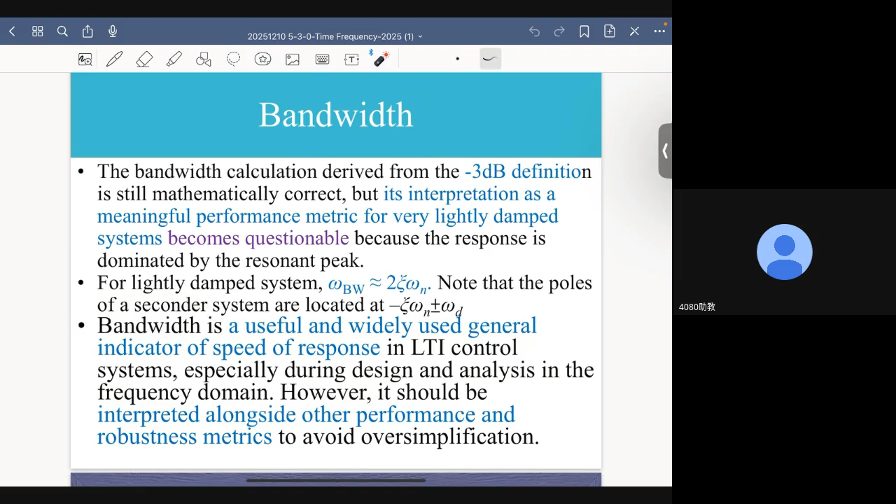Now, the next topic we want to talk about is the impact of an additional zero for underdamped second order systems. Up to now our focus, let me put it this way: we all know that in the s domain or in the frequency domain, transfer function can be represented like this, where P and Q are both polynomials of s or frequency. Now the roots of Q, which is the characteristic polynomial of the system, are called poles. And the roots of P are what we call zeros.

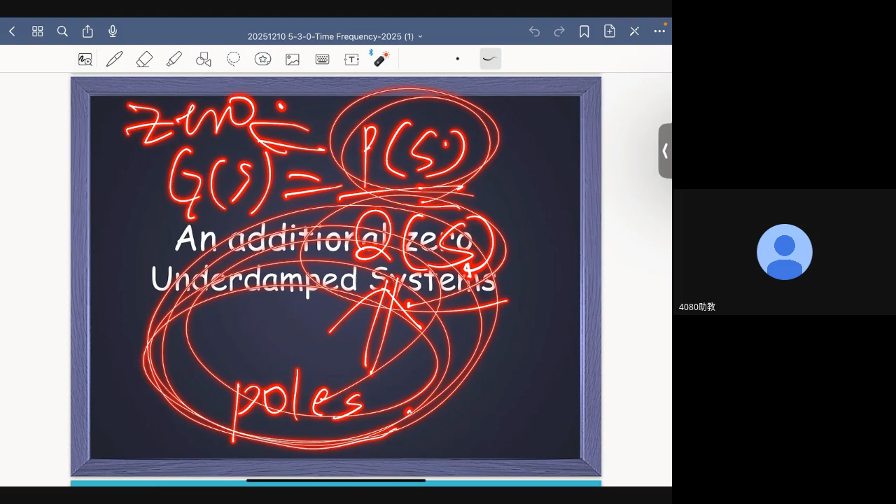Up to now our focus is on poles. It's not that we never talk about zeros, but we have not intensely discussed the impact of zeros. There is only one exception: that is the non-minimum phase system, okay? In that case we have unstable zeros. Now we want to specifically talk about an additional zero, stable or unstable, okay?

Now, for a second order system with an additional zero, its transfer function looks something like this. Originally, for a second order system without a zero, its transfer function looked like this. Okay, so now we have an additional zero, which is located at -a. So the numerator includes this factor, omega n squared divided by a, rather than just s plus a. Why do we want to do that?

Well, why do we want to have these additional terms? The reason is that we want to preserve the original system's DC gain, all right? Let me put it this way. Originally, this is what we have, right, for the standard second order system without zero.

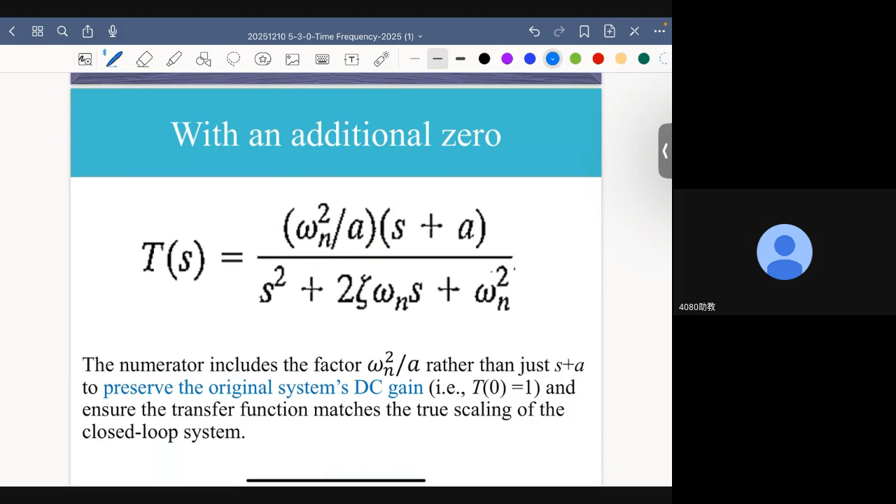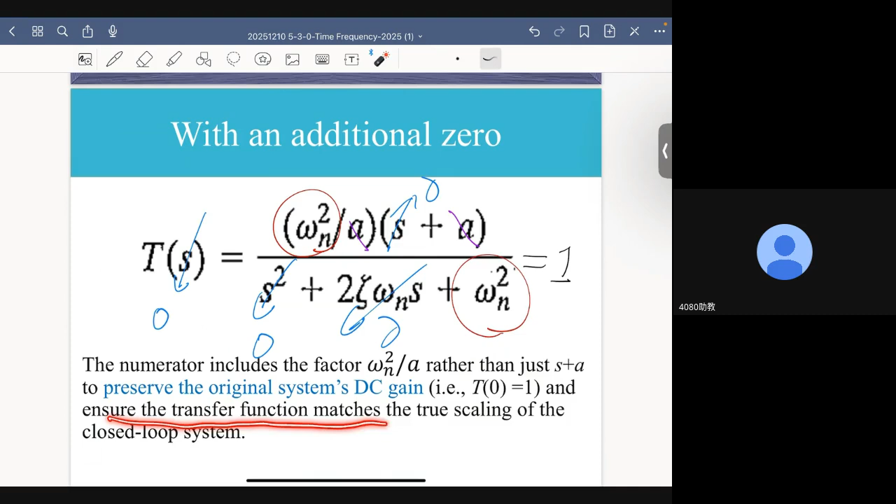Now the same thing happens here. If I have this term, then when s is equal to 0, this becomes 0, and this term becomes 0, and these two cancel out. Then what is left is this and this, okay? Apparently the final number is 1 when s equals 0. So this term is introduced to preserve the original system's DC gain, which is 1, and to ensure that the transfer function matches the true scaling of the closed-loop system, all right?

So where did this additional zero come from? Can I do without it? Probably not, okay? Because here we want to examine PI control for a first order system.

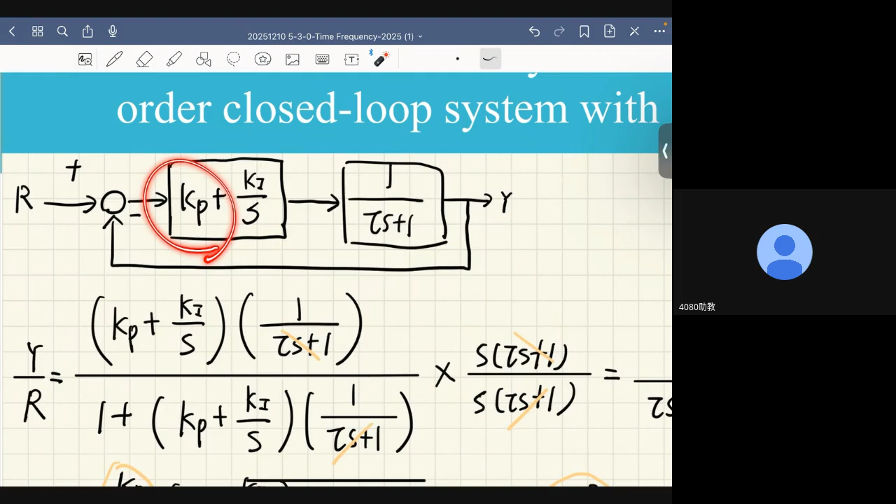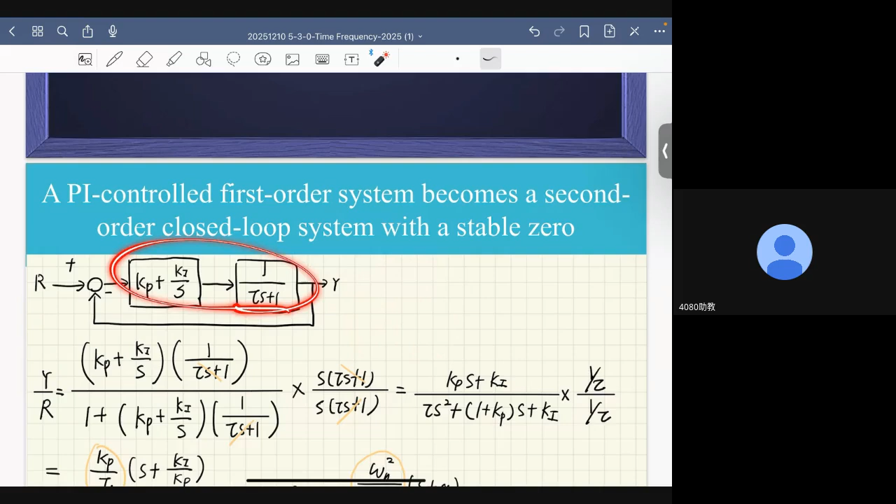Now, this is a first order system where tau is a constant. Let's set up a feedback control system. And this is our controller, which apparently is a PI controller, because this part represents the proportional control, and this part represents the integral control. We all know that for a negative feedback system like this, the transfer function is actually G over 1 plus G, where G in this case is the product of these two transfer functions, which appear here and also here, all right.

Now let me rearrange this representation. The first thing I do is multiply both the numerator and the denominator by s times tau s plus 1. And this cancels out, and these two cancel out with the other, all right.

And then s times this term, okay? So this cancels out, giving me Ki. And by multiplying s with Kp, it gives us Kp times s.

I can do the same thing to the denominator. When I multiply s with 1, it will give me s, which appears here, all right? And then multiplying with the remaining term will give us this result.

Now, let me multiply everything by 1 over tau, and this is what I get. Why do I want to do that? Because I want to convert the leading coefficient of the denominator of this transfer function to 1, okay? So this is exactly what I get.

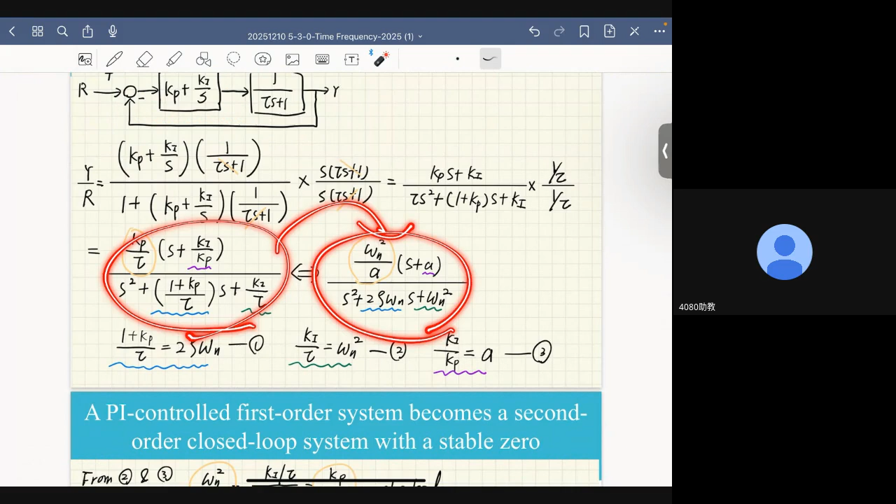Now, this is actually the transfer function of this feedback control system. Let me compare this with this, term by term. Remember, this is the transfer function that we just defined.

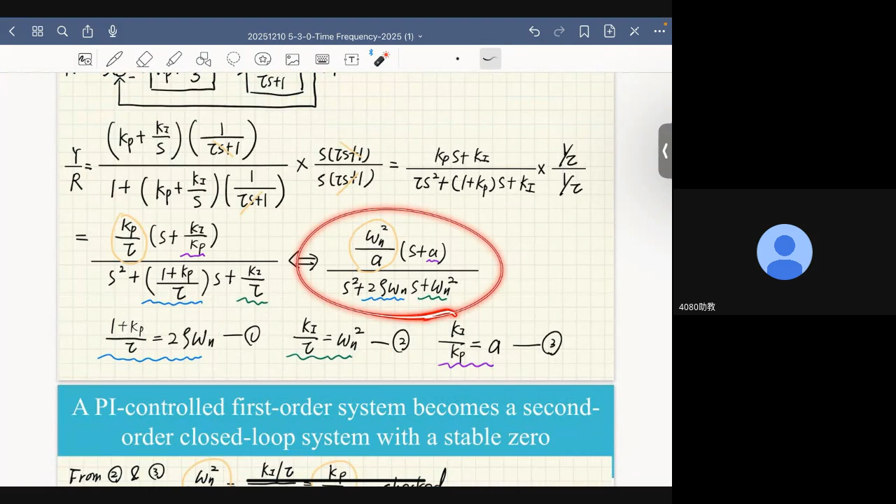A standard second order transfer function with an additional zero. So let's compare the transfer function of this feedback control system with the standard second order system's transfer function, plus an additional zero.

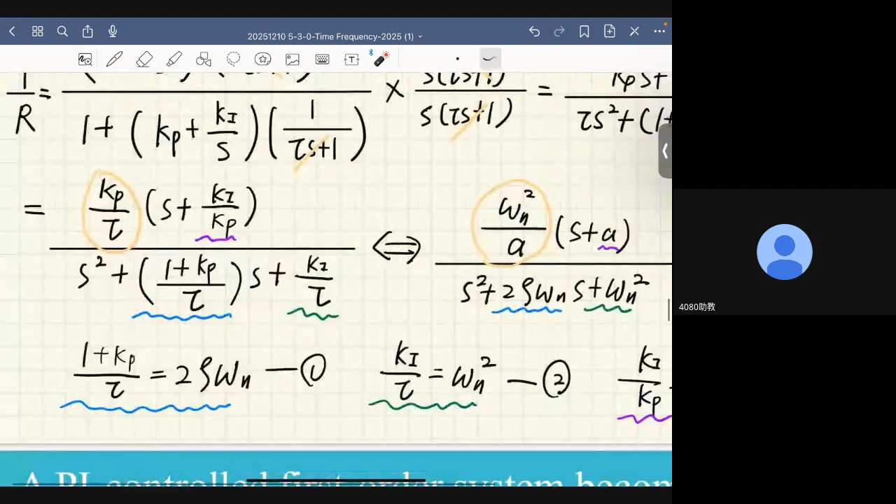Term by term, this is actually this. Similarly, this corresponds to this, and this corresponds to this. I hope it is easy for you to see, because for these term by term connections, I use colors to identify their relationship.

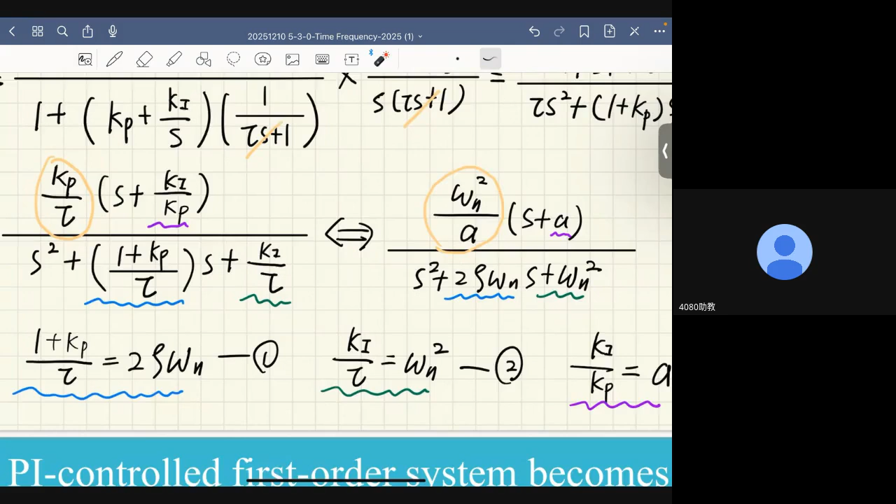So if this equals this, then 1 plus Kp divided by tau should be equal to 2 zeta omega n, where zeta is the damping ratio and omega n is the natural frequency. This gives me equation 1.

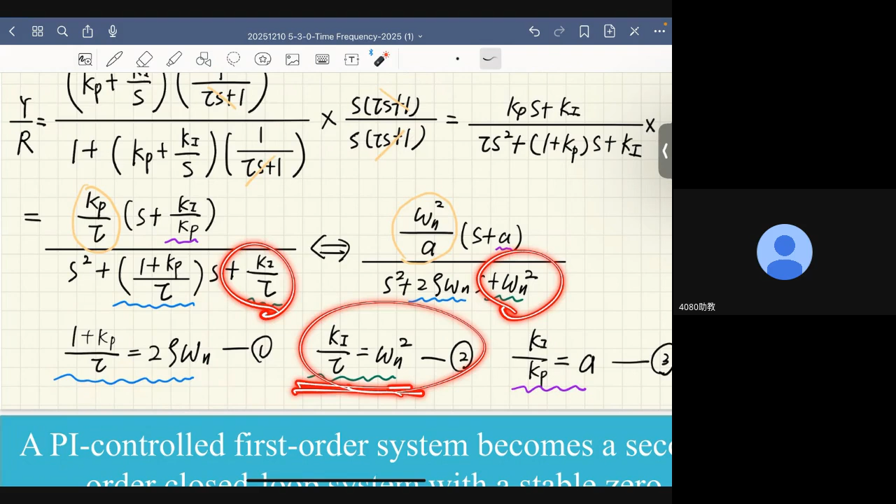If this is equal to this, then this gives us equation 2. Finally, if this is equal to this, then Ki over Kp is actually equal to A.

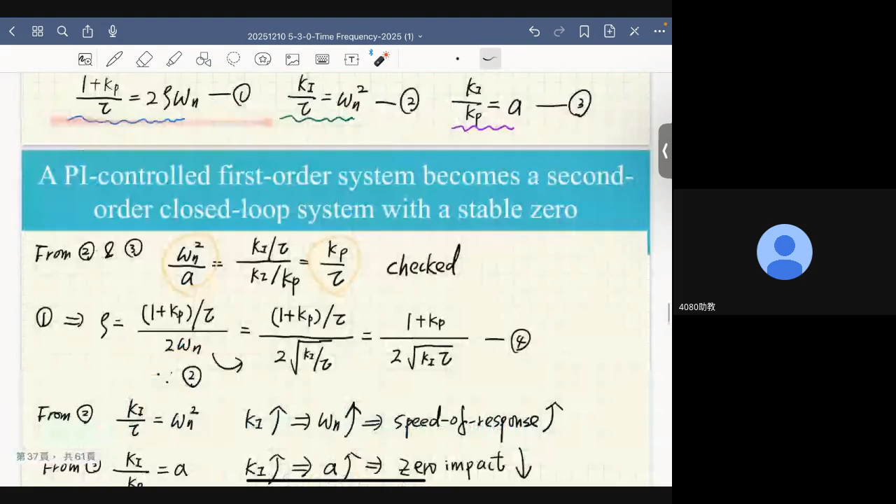Now, from equation 1, what do I get? If I rearrange equation 1, this is what I get. Now the same thing happens here. From equation 2, what do I see?

Equation 2 tells us that omega n squared is actually proportional to Ki. Why do I care about this equation? Because I'm designing this controller.

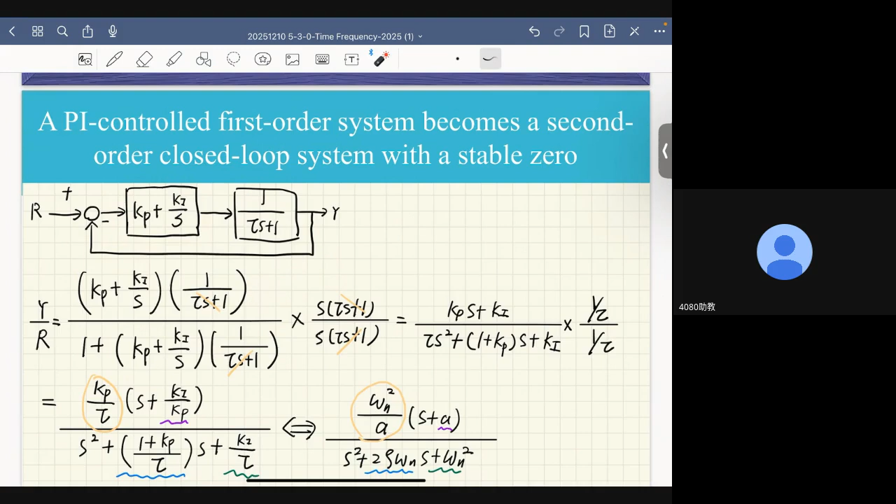The first thing I do is set up the feedback control configuration. The second thing I do is choose PI control. So after doing the first and second things, the third thing I need to do is determine the values of Ki and Kp. I need to determine the right values for my proportional control and integral control.

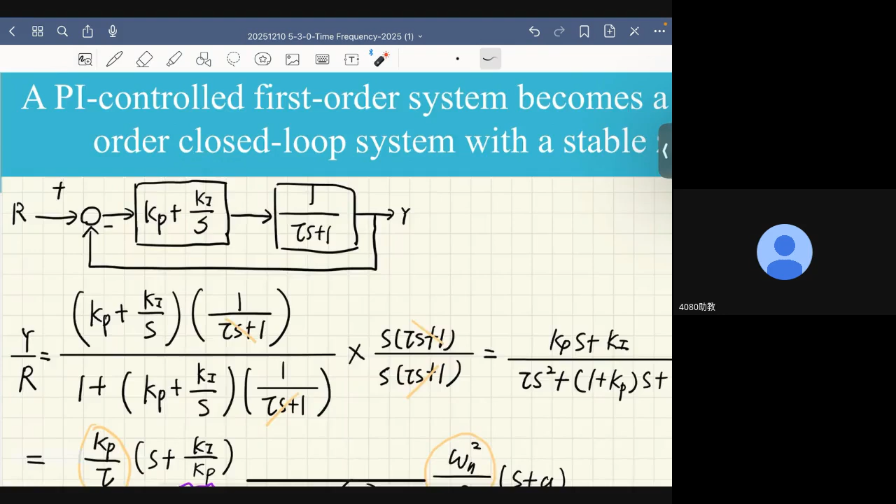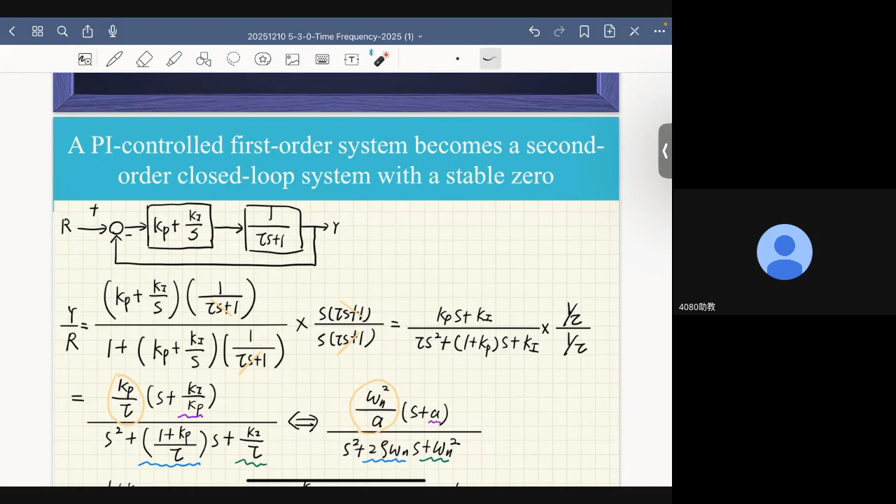Now, how do I determine Kp and Ki? Since I'm dealing with a second order system, and since I already know the impacts of damping ratio and natural frequency on the performance of a standard second order system, the next thing I want to do is identify how Kp and Ki impact natural frequency and damping ratio.

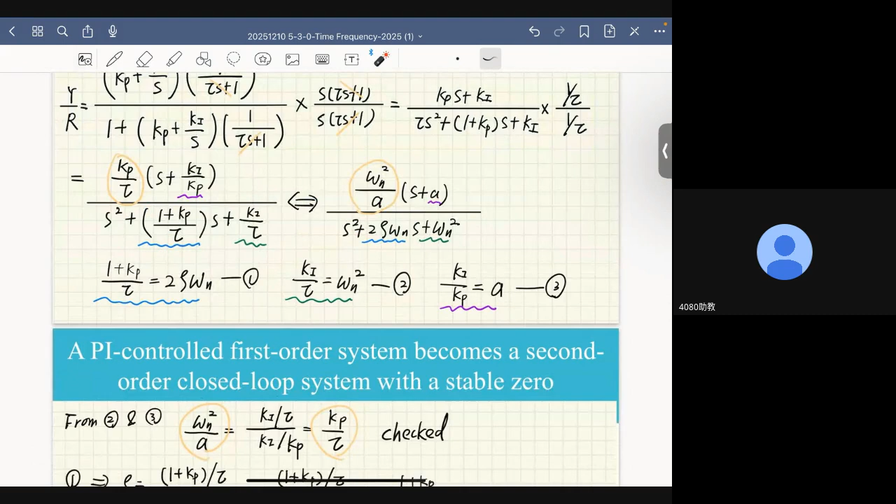For example, here it tells us if I increase the value of Ki, that is, increase the strength of the integral control, then the natural frequency will become larger. In this particular case, increasing integral control increases the speed of response of this feedback control system. So this equation tells me about the utility of the integral control.

Now, with this equation, I know that if Ki is fixed, given, then increasing Kp increases the damping ratio. So these results give me some clues on how to tune my integral and proportional controllers.

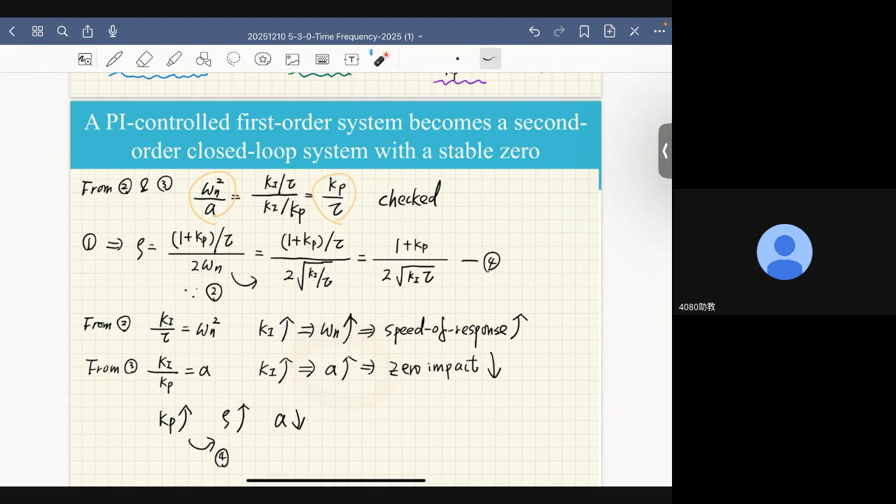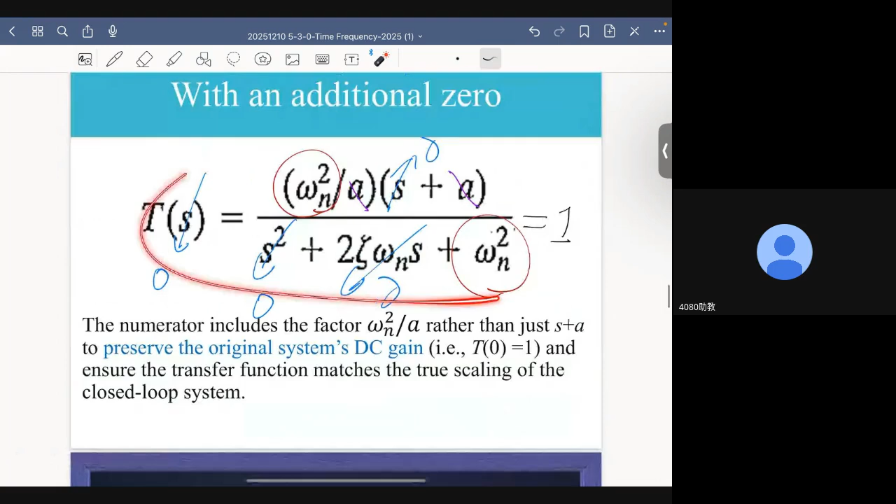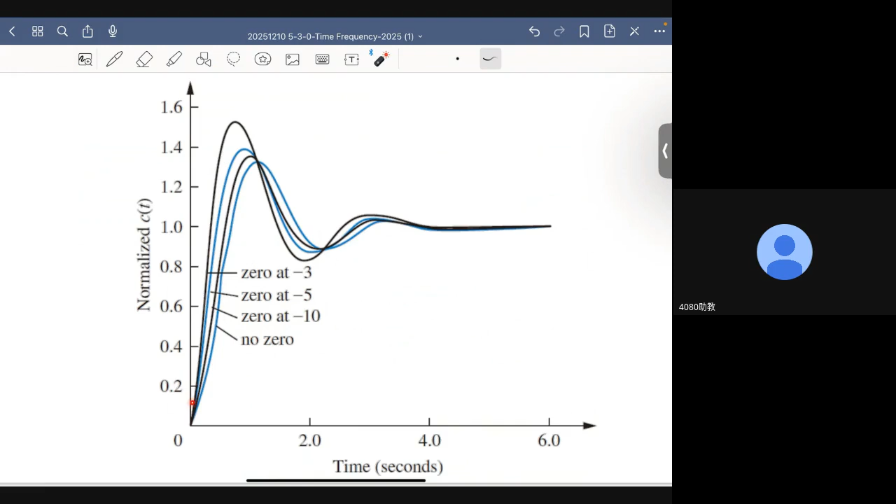Now let me introduce a zero. In the beginning, let's assume it is located relatively far away from the imaginary axis, at s equals minus 10. Then, compared to this blue curve, with this zero, the overshoot becomes slightly larger.

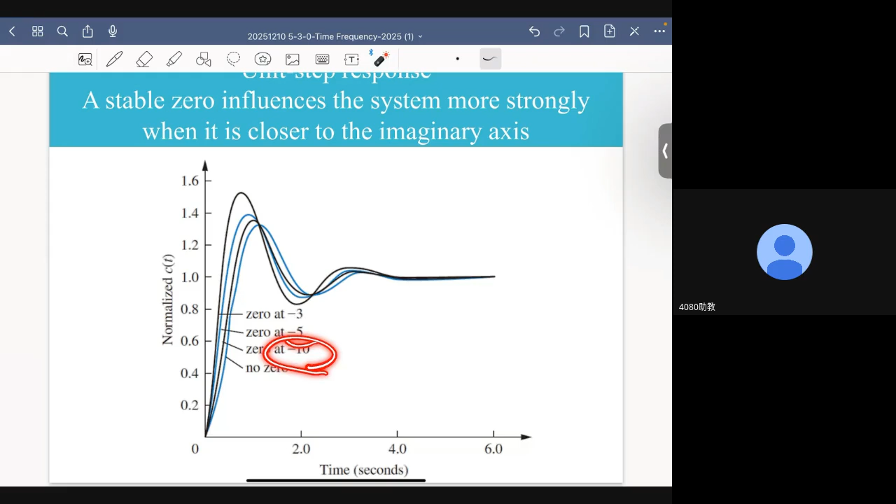But if I move the zero closer to the imaginary axis, let's say from minus 10 to minus 5, as you can see, the overshoot becomes even more, it becomes even larger.

Now let me do that again, even closer to the imaginary axis. Now I move the zero from minus 5 to minus 3.

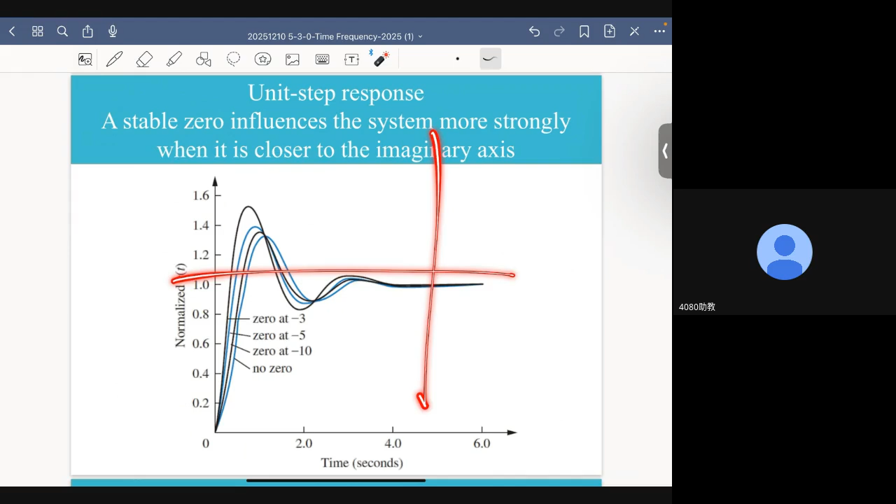Now the overshoot is even more pronounced. So why is that the case? Here, as we can see, a stable 0 - what do I mean stable 0? I mean the zero is on the left-hand side of the s-plane. Otherwise, if I have an unstable 0, whenever I have an unstable 0, what I have is a non-minimum phase system. Dealing with non-minimum phase systems is another story. Up to now, people still don't know how to deal with non-minimum phase systems effectively.

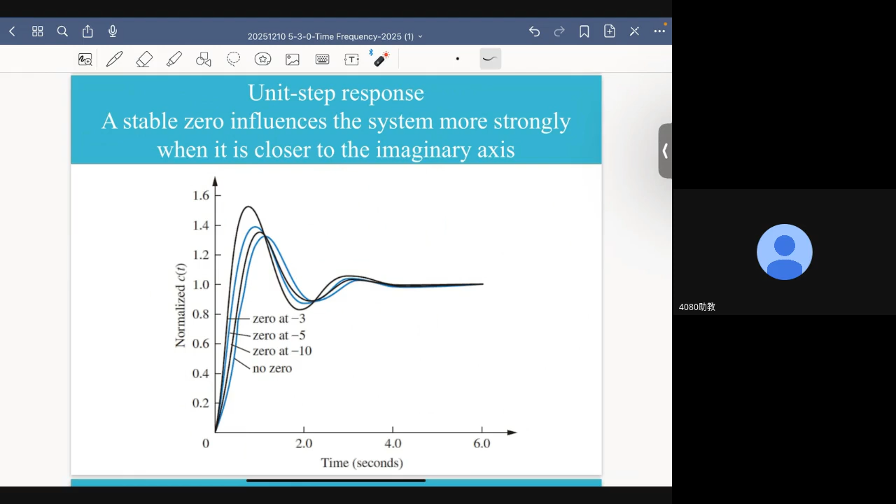Now a stable 0 influences the system more strongly when it is closer to the imaginary axis. This is what we can tell from the results of these curves. Now, one important thing is why this is happening, why this statement is true. What's the reason behind it?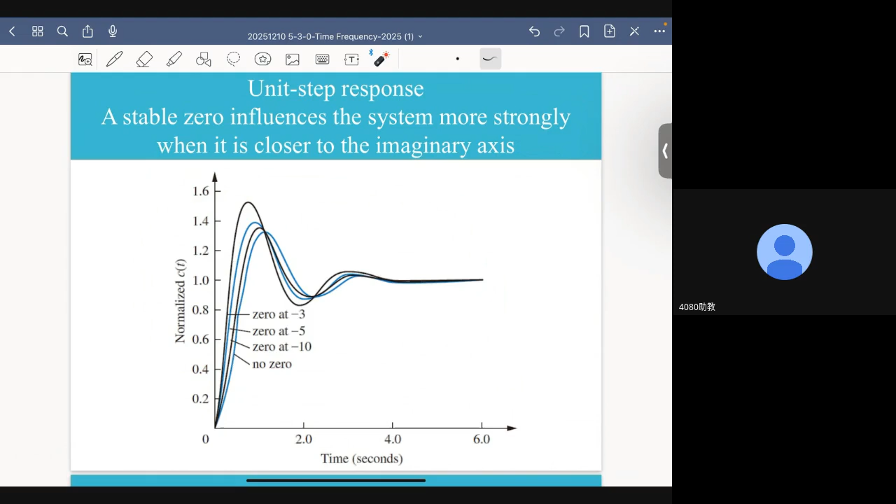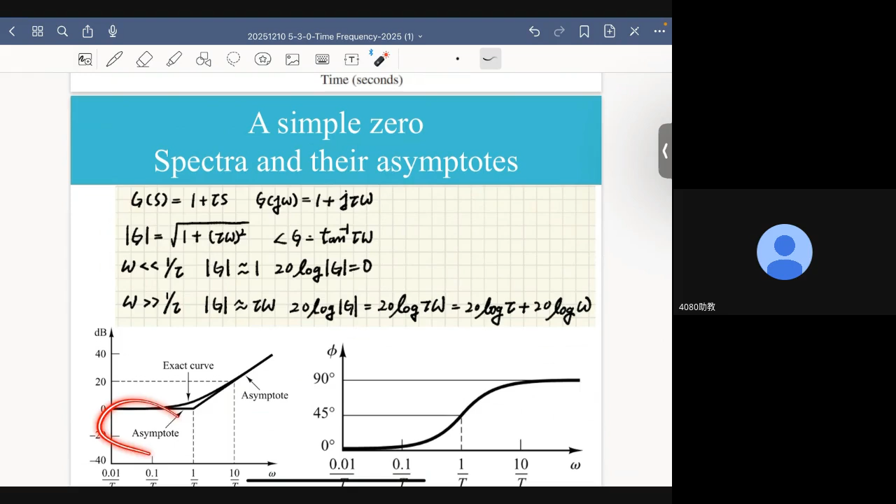These are the results given in the time domain, but the real reason is hidden in the frequency domain. We saw this slide before. Here, what we have is the spectrums for a simple zero. These are the mathematical derivations for setting up the asymptotic statics for a simple zero, similar to a simple pole.

Here, we identify the corner frequency. But here, T is not time constant - time constant comes from the characteristic equation, from the denominator of the transfer function. This T is related to the numerator of the transfer function, so this is not a corner frequency, but you can still think of it as a break frequency. After all, it breaks the amplitude response of the simple zero into two regions.

Now, for a simple pole, the magnitude plot looks something like this - it goes in this direction, that is, the slope here is minus 20 dB per decade. But for a zero, its impact is exactly the opposite. Instead of decaying at a rate of 20 dB per decade, it actually increases with frequency at a rate of positive 20 dB per decade.

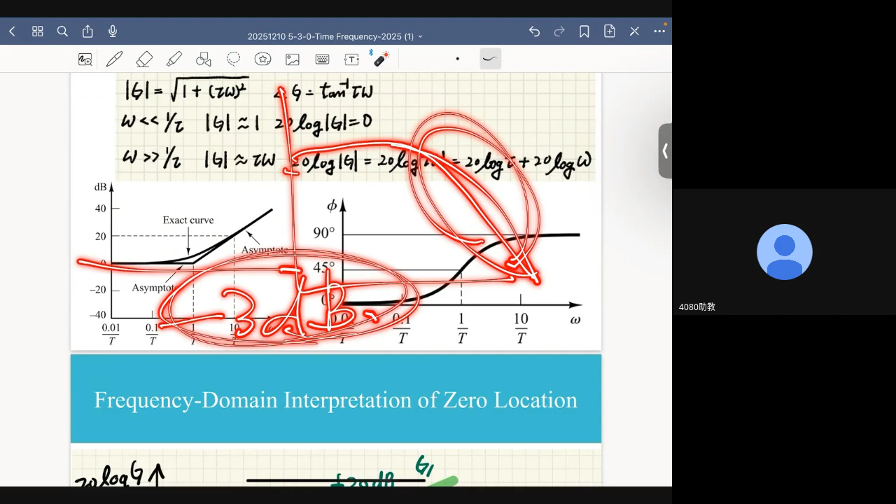So what happens is this tends to increase the bandwidth of the system, because by definition bandwidth is where your frequency response drops minus 3 dB. If I introduce a zero, it will reverse this decaying trend, so I will probably reach the minus 3 dB level at a much higher frequency.

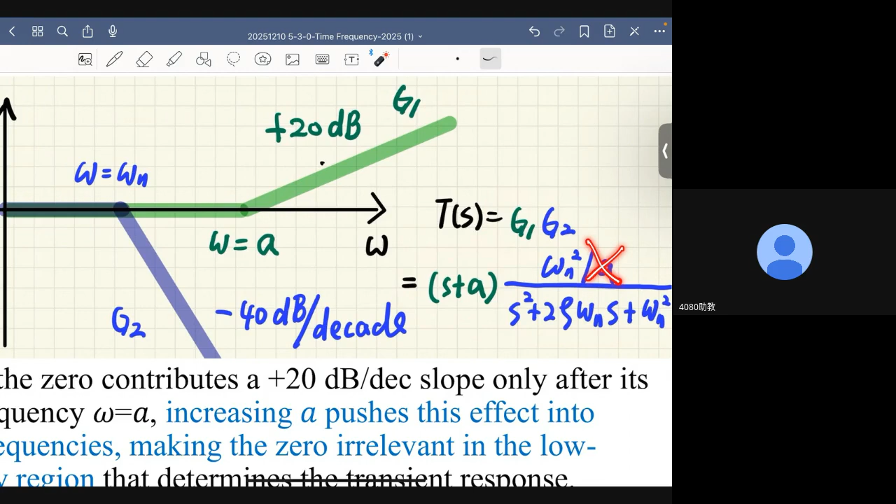So remember what we have is this system. Let me break it into two parts: the green part represents the zero, and the blue part represents the standard second order system. Let's just ignore A for the time being.

Now remember the reason why we want the Bode diagram - we want to use the magnitude plot of the Bode diagram in the first place because when it comes to the amplitude spectrums, we can add their frequency response curves together. Here we have multiplication, but when I take log, this multiplication converts to addition. Remember that. Now for the zero's amplitude, there are two ways these two parts can be put together.

It all depends on which subsystem starts breaking away earlier - which subsystem starts its so-called breakaway action first. Now for this case, because the zero contributes a positive 20 dB per decade slope only after its break frequency of omega a, the break frequency for the zero is here.

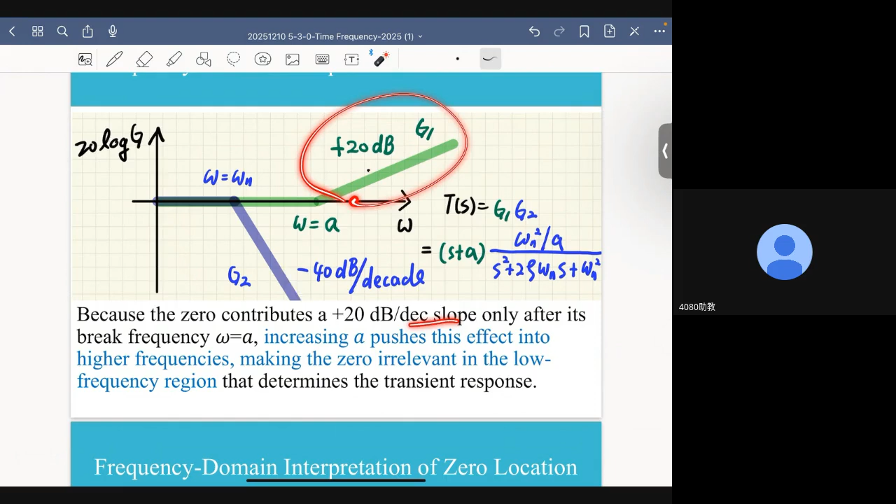Because if the natural frequency of this second order system, which is approximately the break frequency of the second order system, is located here, then this minus 40 dB per decade impact appears earlier than the zero's impact. Since the slope of this curve is minus 40 dB per decade, in comparison this positive 20 dB per decade increase becomes relatively insignificant - it will be almost cancelled out by this factor. But it can be the other way around.

Decreasing A shifts the effect into lower frequency. As a result, Z significantly amplifies the resonance and produces overshoot, because it appears earlier in the frequency domain. Therefore, it will most likely increase the bandwidth, and the system will move faster. But the cost, the price we need to pay, is that resonance can be amplified and we might have larger overshoot.

So what we are seeing here is that the relative location of the pole and zero really matters. This is an ideal case. By contrast, this is a non-ideal situation.

Now let's look at the impact of the relative location of Z and the damping ratio. Here, what I have is the magnitude plots of a standard second order system, which turns on when the frequency increases to the natural frequency of the second order system.

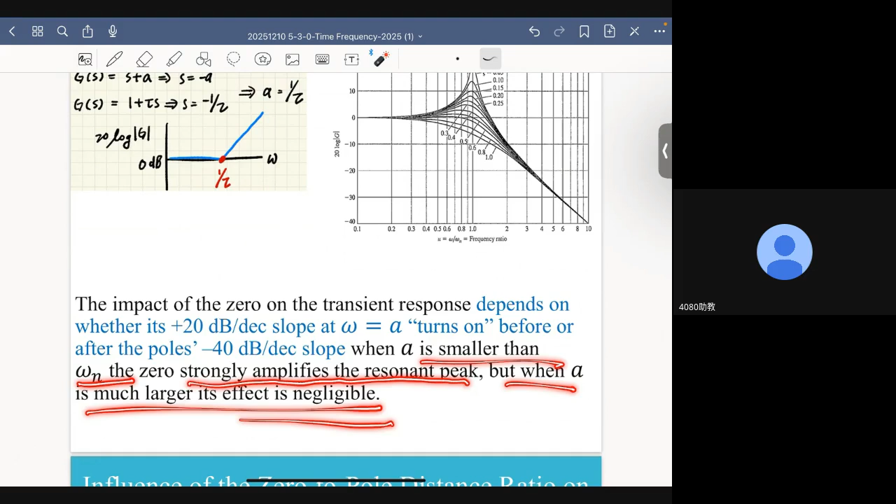The impact of the zero on the transient response depends on whether its 20 dB slope at omega A turns on before or after the pole's minus 40 dB per decade slope action. When A is smaller than omega n, the zero strongly amplifies the resonant peaks. But when A is much larger, its effect becomes negligible.

Now let's demonstrate that by showing the unit step responses with different zero to pole distance ratios. A is the distance between the zero and the imaginary axis. Remember, the root of the characteristic equation is minus zeta omega n plus j omega d, where omega d is the damped natural frequency, which equals omega n times the square root of 1 minus zeta squared, when zeta is smaller than 1.

So here we are talking about an underdamped system. The parameter is the ratio between the distance of the zero to the imaginary axis and the distance of the pole to the imaginary axis. This ratio determines which frequency will appear earlier in the frequency domain.

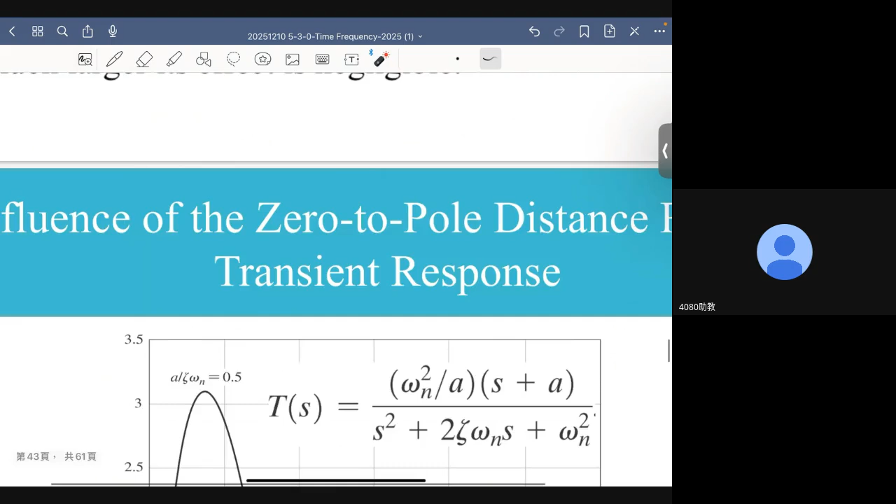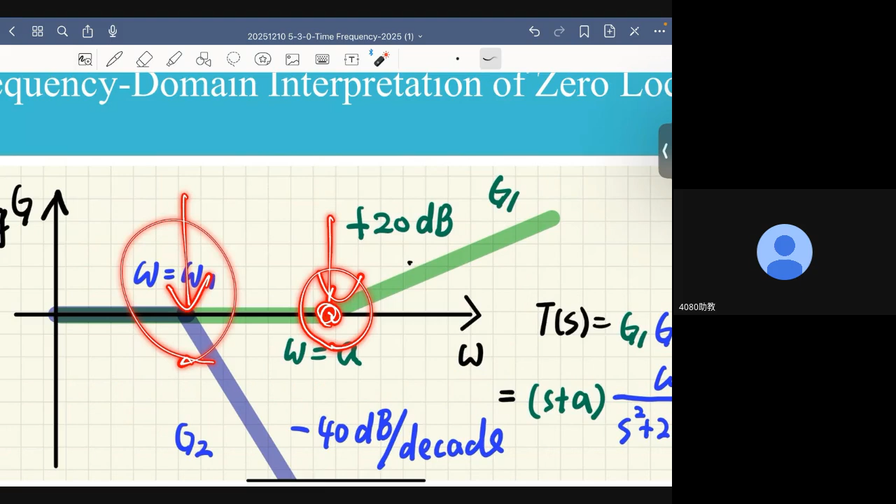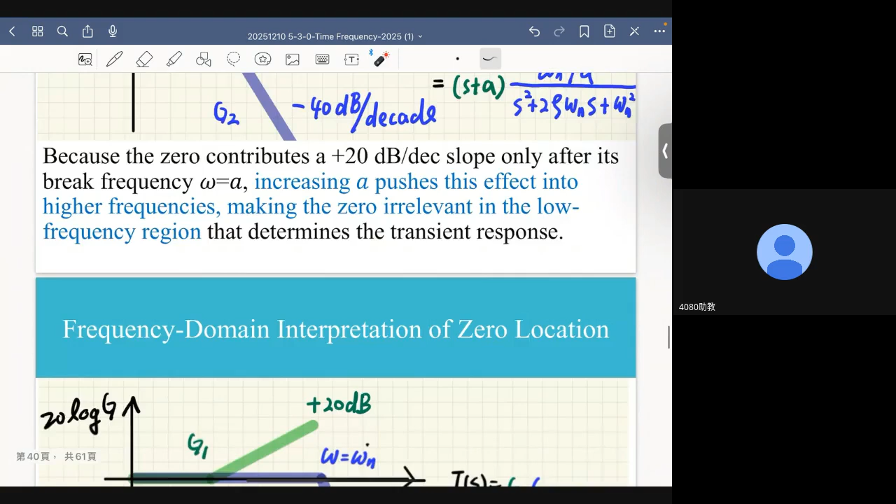Now, when this ratio is very, very large, meaning A is much larger than zeta omega n, this frequency is about 10 times higher than that frequency. So the high frequency component enhancement impact caused by the zero becomes negligible in this case, and therefore its unit step response is very similar to that of a standard second order system.

However, if I move the zero closer to the imaginary axis, the ratio drops from 10 to 2, and as you can see, the overshoot increases dramatically. If I go one step further, so that the pole and zero have the same distance to the imaginary axis, the overshoot becomes even larger. And it becomes very large when this ratio reaches 0.5.

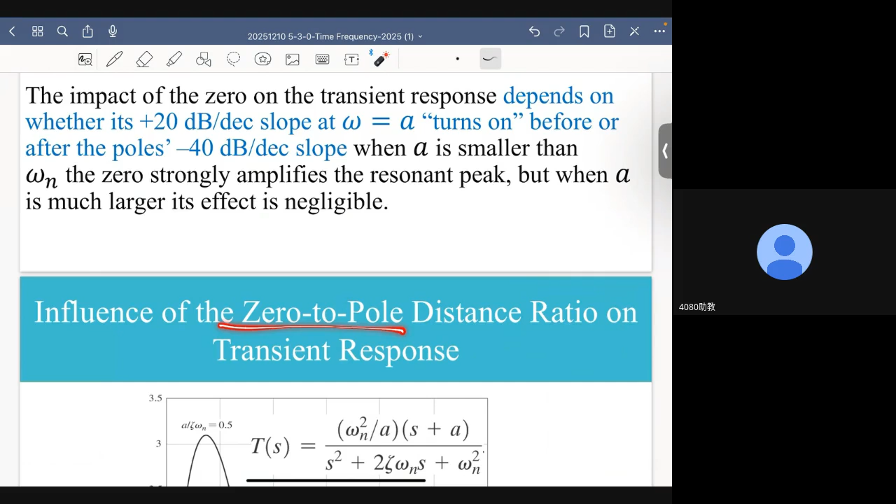So that is why the zero matters, and how much impact a zero has really depends on this ratio, the zero to pole distance ratio, meaning distance to the imaginary axis.

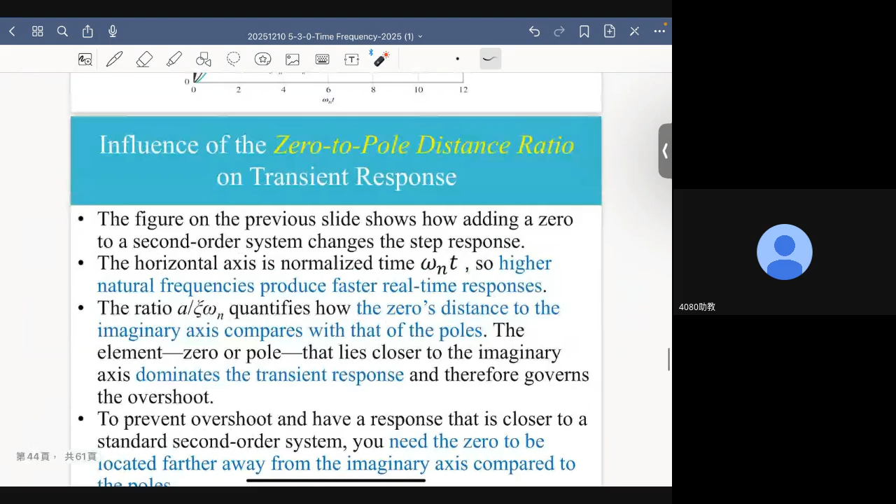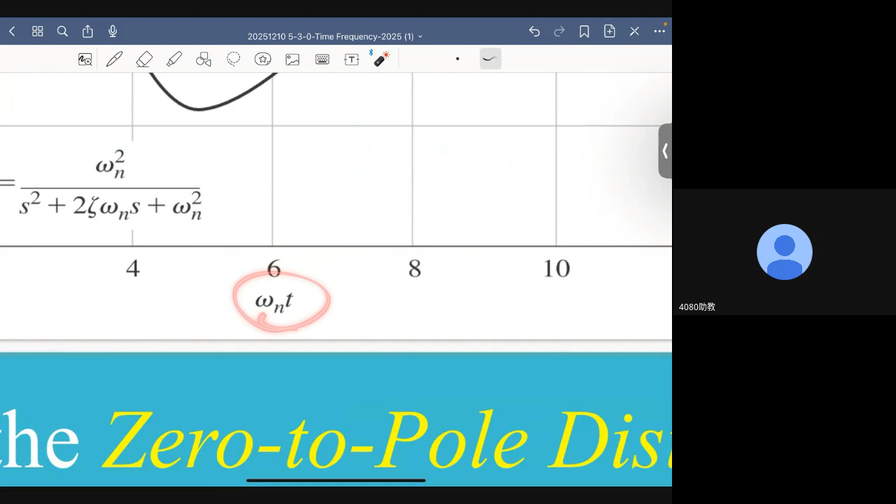So the figure on the previous slide shows how adding a zero to a second order system changes the step response. The first thing you need to know is that for the horizontal axis, the variable is not t, but omega n t. We talked about that before. This is a normalized time, so the horizontal axis is normalized time omega n t.

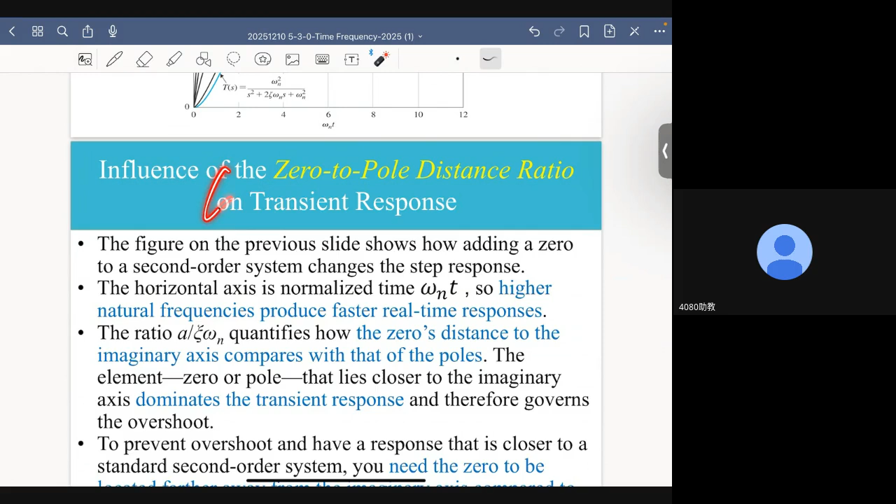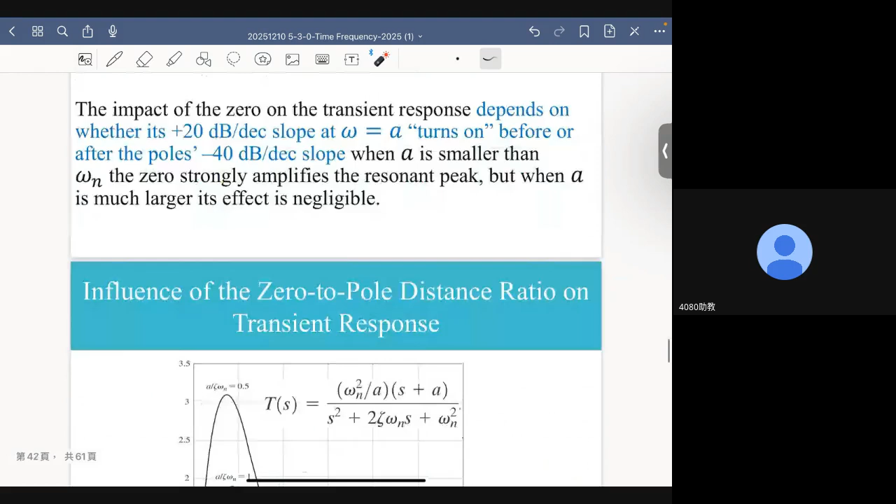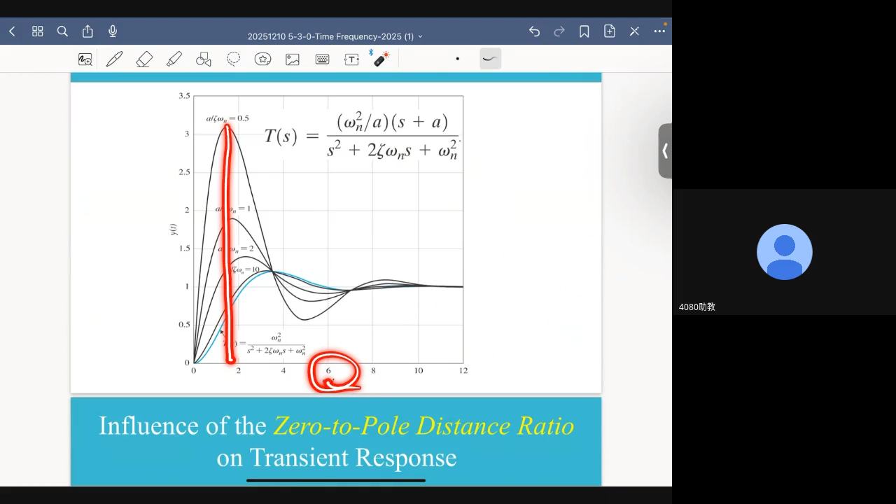So higher frequencies produce a faster real response, because if omega n t is a fixed number, let's say 1, then t equals 1 over omega n. Therefore, if omega n is larger, t is smaller, which means to reach the peak, for example, when omega n is larger, the real time is actually much smaller compared to when omega n is small.

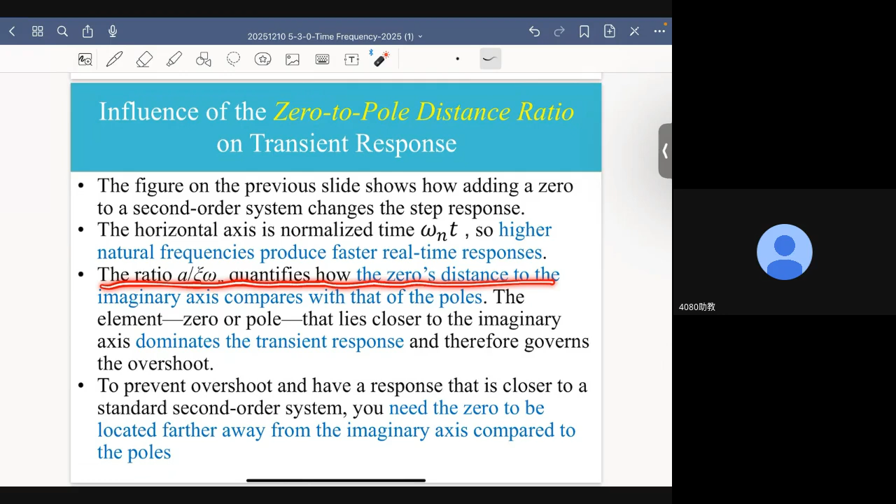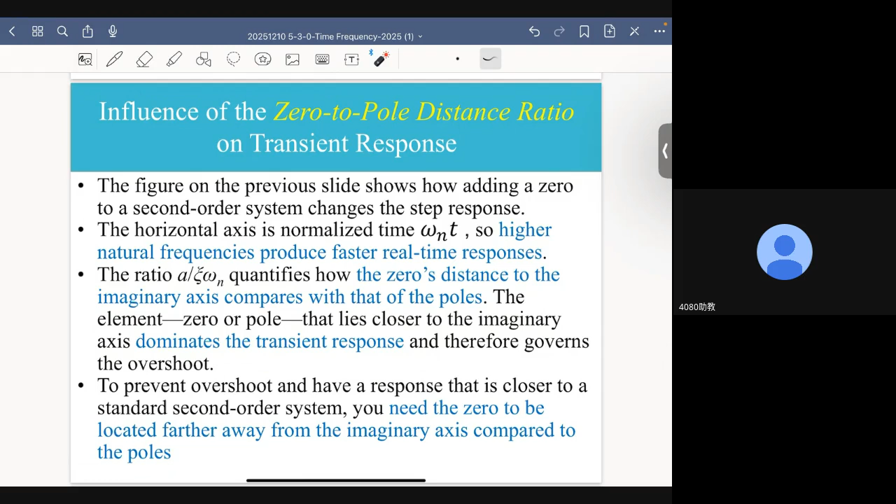Here the ratio a over zeta omega n quantifies how the zero's distance to the imaginary axis compares with that of the poles. This is the concept of relative distance. The element, zero or pole, that lies closer to the imaginary axis dominates the transient response. Which one matters really determines which one is closer to the imaginary axis, meaning which one is turned on earlier in the frequency domain.

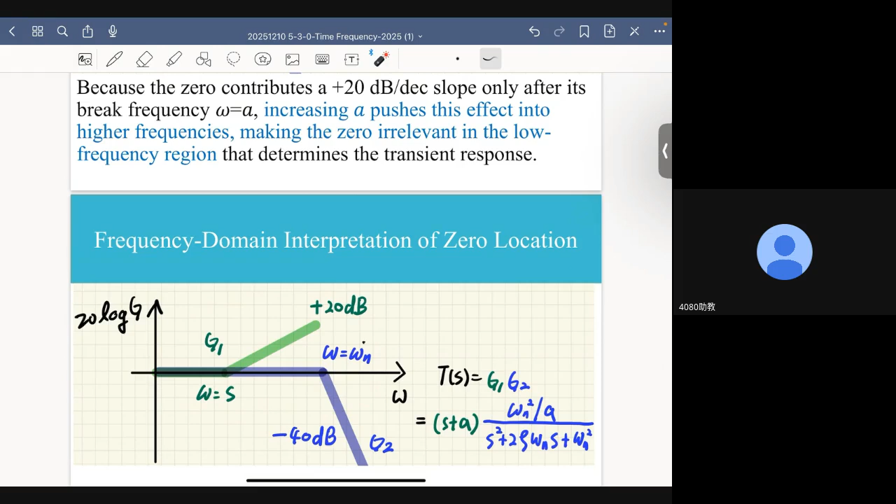This explanation actually justifies our devotion to the study of frequency domains, because without the concept of frequency domain, it is very difficult to explain why a stable zero can have an impact on the system, and why its relative location with respect to the pole is really a dominant factor when it comes to the transient response of such second order systems.

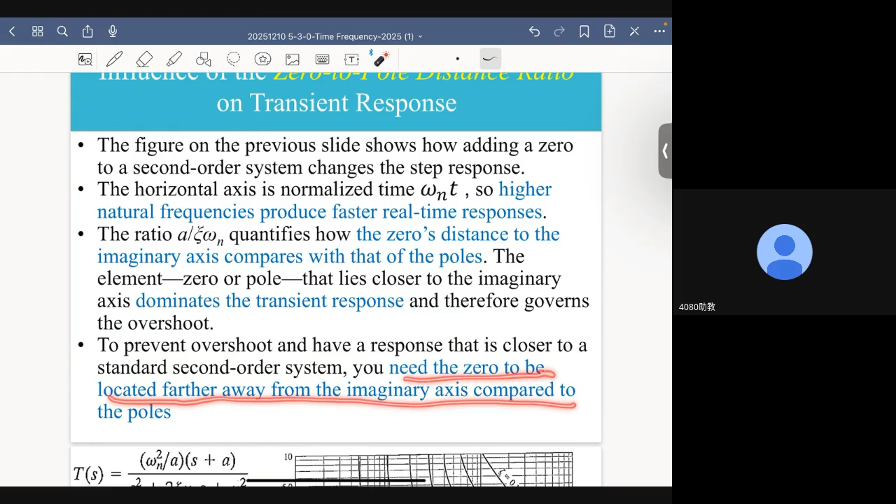So to prevent overshoot and have a response closer to the standard second order system, you need the zero to be located further away from the imaginary axis compared to the poles. Therefore, let's go back to the PI controller.

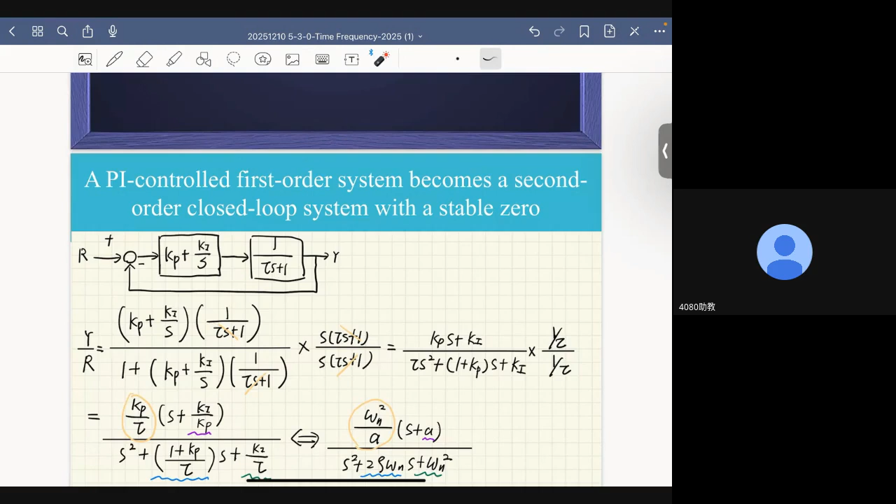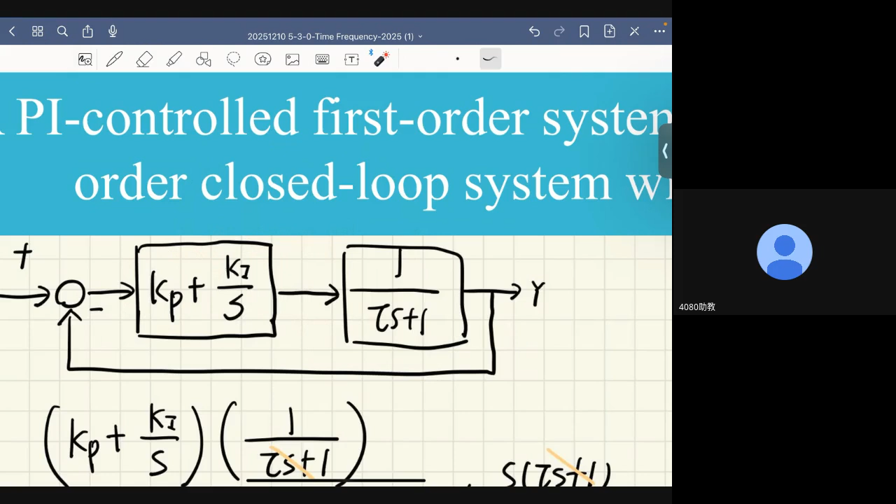Why is designing PI controllers difficult? Because here you only have two parameters, Kp and Ki, but you have three sets of conditions to take into account. First, when it comes to speed, you need to consider omega n, the natural frequency. When it comes to relative stability, you need to consider damping ratio.

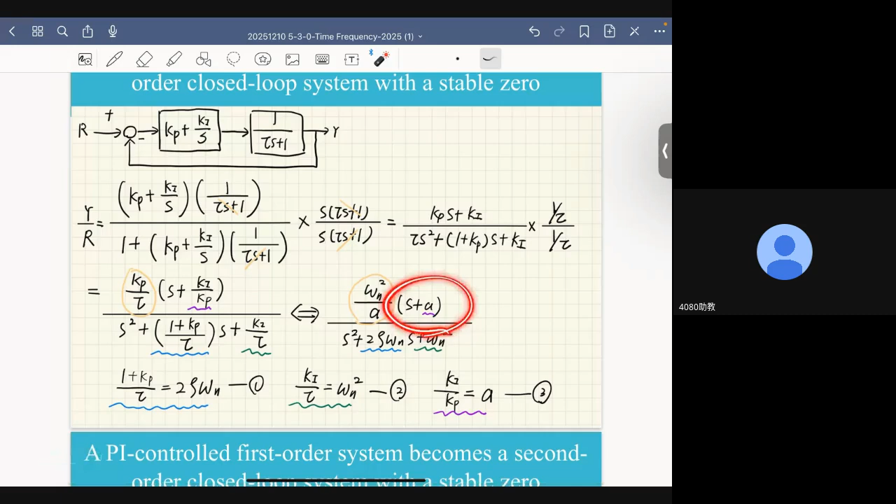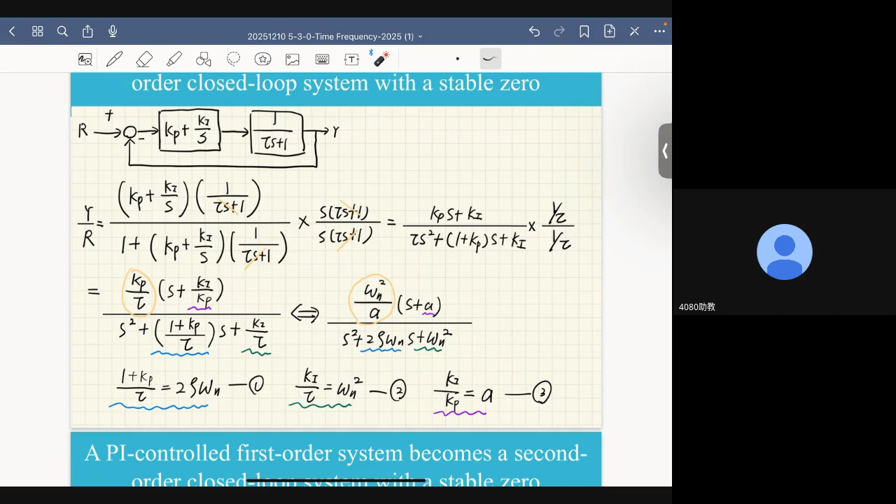Now, because there is an additional zero, where a is equal to Ki over Kp, what you need is for this A to be large enough, to push A further away from the imaginary axis, further to the left on the s-plane, to prevent this zero from dominating the transient response, which would generate redundant overshoot. And that is something we don't want.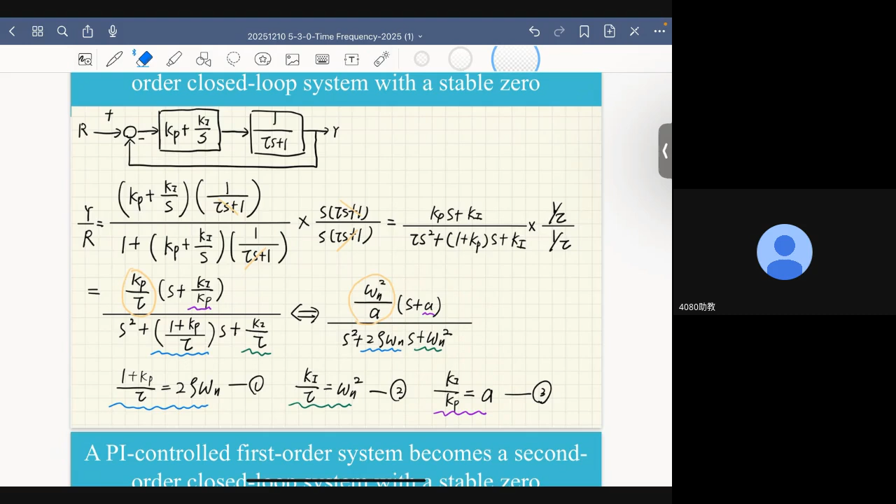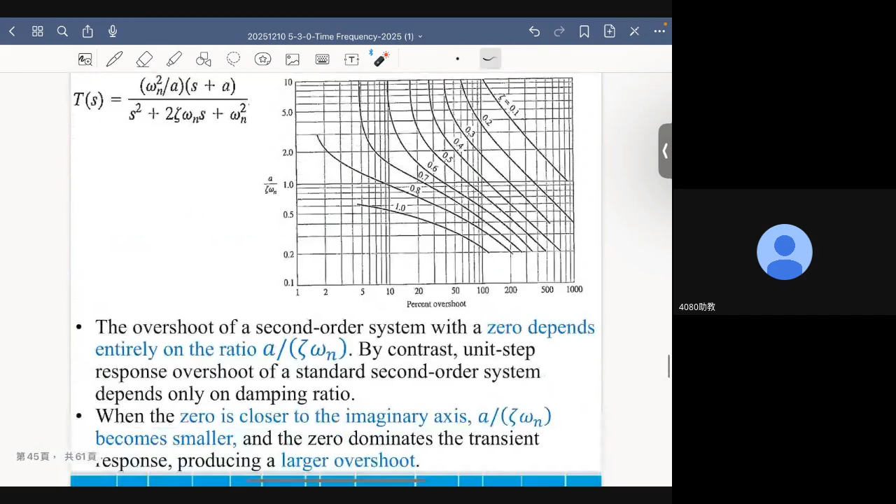So there are trade-offs we need to make to balance these three specifications with only two parameters. To examine how this impacts overshoot, this figure is really helpful.

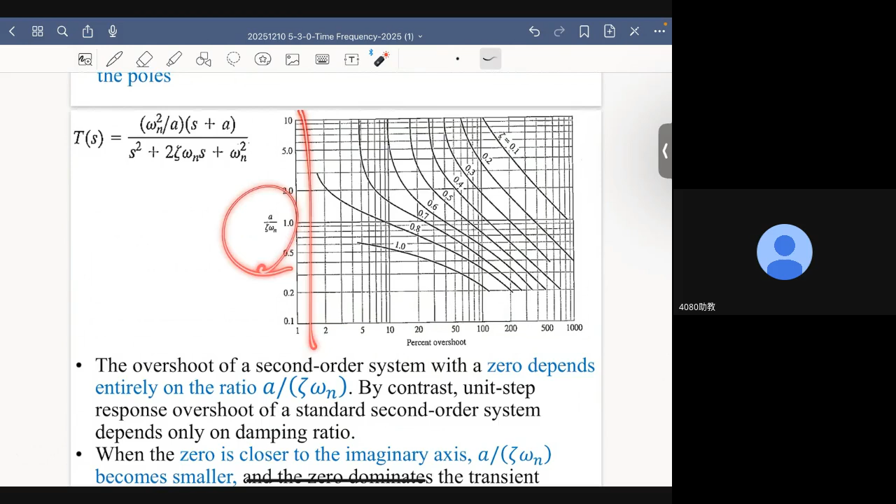On the horizontal axis we have percent overshoot. On the vertical axis we have A over zeta omega. This represents the distance of the zero to the imaginary axis, and this represents the distance of the pole to the imaginary axis. So this is really the ratio that matters for this second order system with an additional zero.

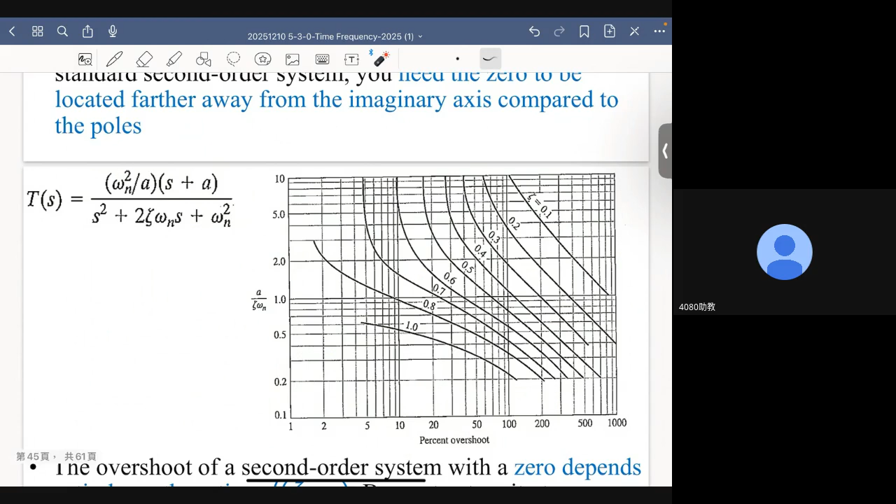So what can I learn from this figure? First, this is the overshoot, and this is the ratio of A with respect to zeta omega. Second, there is a family of curves, and the parameter for this family of curves is zeta. So different damping ratios give different overshoot — one damping ratio, one curve. Apparently damping ratio has something to do with overshoot.

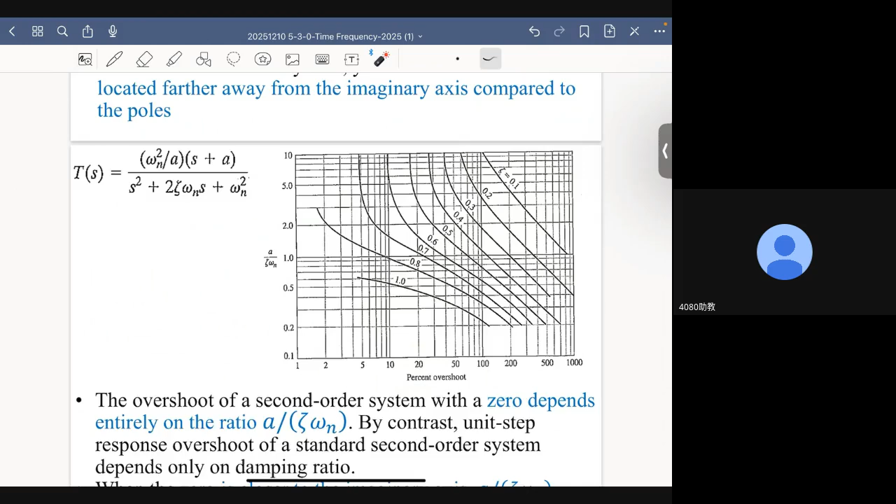That is not surprising. Let me go back here — we saw this figure in the previous lecture. For a standard second order system without any zeros, the overshoot depends only on damping ratio, nothing to do with natural frequency.

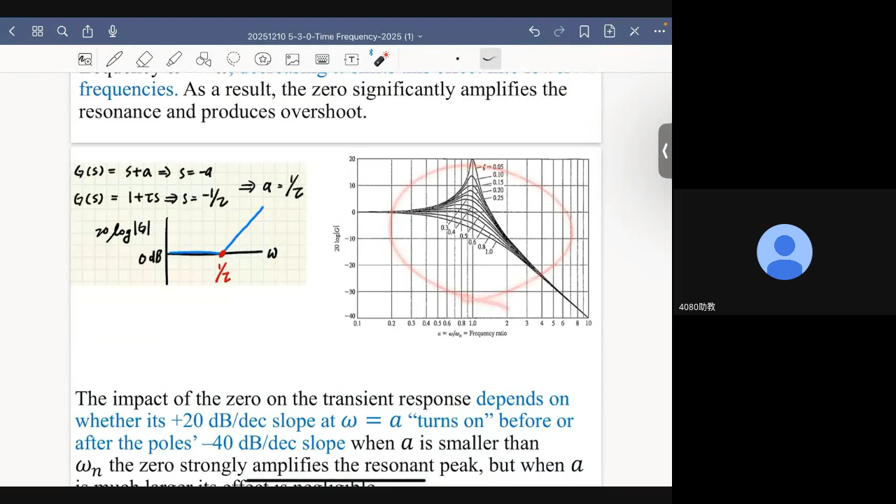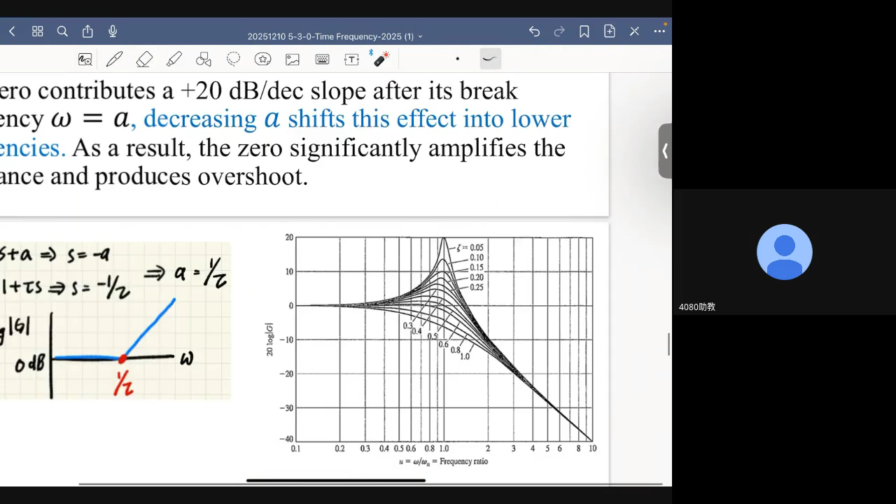But here things are slightly different. In this figure we can see that for a standard second order system, as damping ratio becomes smaller, the resonant peak becomes more pronounced and distinct. This is exactly what we have here, because as the value of zeta decreases, this family of curves actually moves in the rightward direction, meaning the percent overshoot becomes larger.